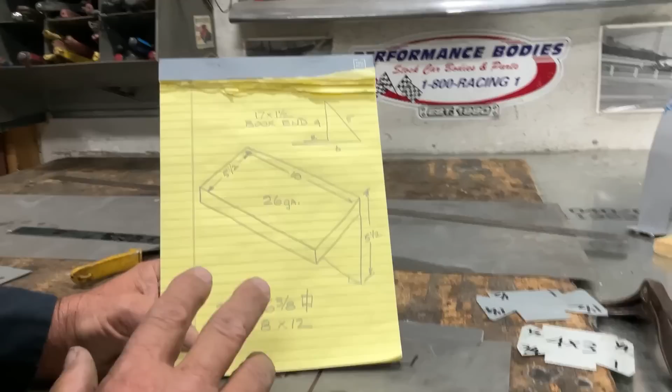Come on in real close and take a look at this. This is a typical drawing that I would start almost every project with, because until you can see it, you can't make it. So this is a bookshelf. This is the gusset, and this is the base that the books will sit on.

And we're going to make this, I think I've got a couple of different ways we're going to make this. And in order to speed up the process, we're going to use all of our professional tools.

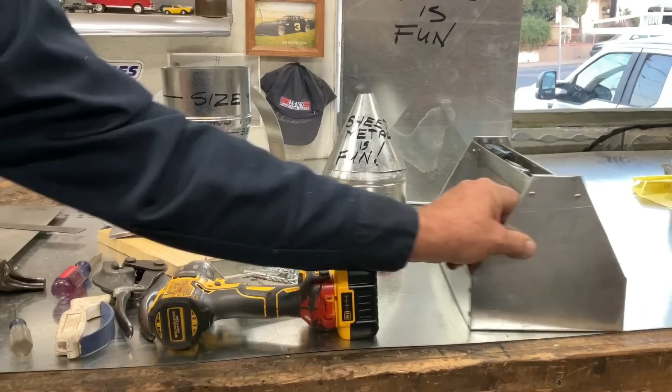But this whole project today that we're going to make could be made, if you go back and watch our video on how to make a tool tray with basic hand tools, the way we made this tool tray, you could use those same principles and those same processes to make this bookshelf. But I want to speed it up a little bit because there's a lot I want to get through.

So let's get right to it. So what we're going to do is we're going to start by making this part of the bookshelf is going to be a pan, and then we're going to make a left and a right gusset. We'll get to the bookend in a few minutes.

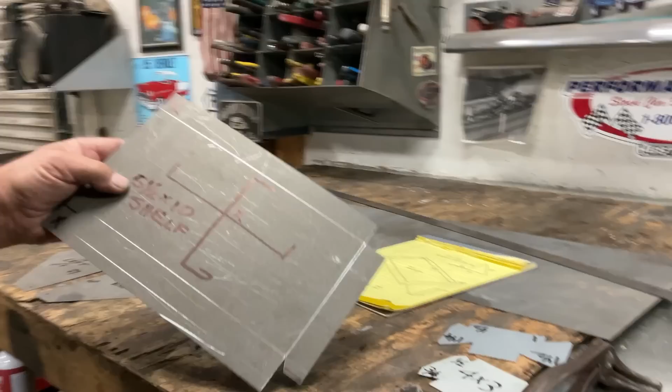So here's the pan. It's a 5.5 by 10 inch shelf, and right here I'm going to show you 3 different ways that we typically mark things in the shop, and these are just ways that this project will never be clearer in your mind than it is when you're right here, you're making it, you're notching it, you're thinking about it. It's never going to be more clear in your mind.

So while it is that fresh and that clear in your mind, go ahead and mark it. And then if you get a phone call or you started at the end of the day and you come back tomorrow, you don't have to go back and start from scratch. You can look at your instructions and you can pick right up where you left off.

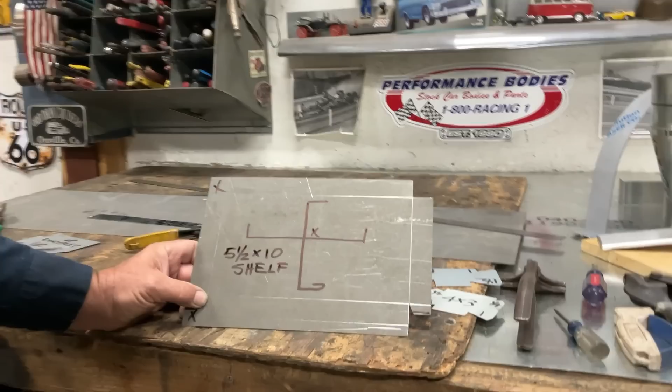So right here I've got 3 different ways that we would typically mark things in a shop. So a lot of this stuff for the folks that are going to be making these things at home, and also there's something that I have to be realistic about. A lot of you may never pick up a snip or a hand seamer or a hammer, but you may be following along at what we're doing here just to acquaint yourself with the process.

And I like that. I love that, because if there's one thing that we all need to do is we all need to become more capable. We all need to become more self-sufficient. We all need to become more aware of the world around us. I would like all of you to become more capable and have a marketable skill.

So AI may be coming down the road. We don't know. Who knows? And there's always going to be a spot for somebody who can show up, make something with their hands, and install it. That's going to be a long way down the road. So I want you to follow along and learn about how important it is to become aware of the process and how we develop a pattern, how we fabricate a pattern, and how we end up with a finished product.

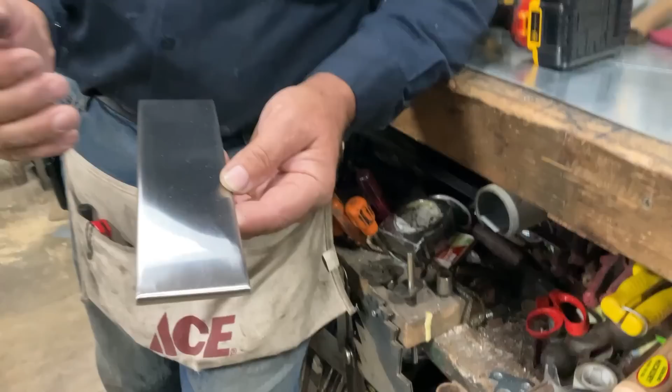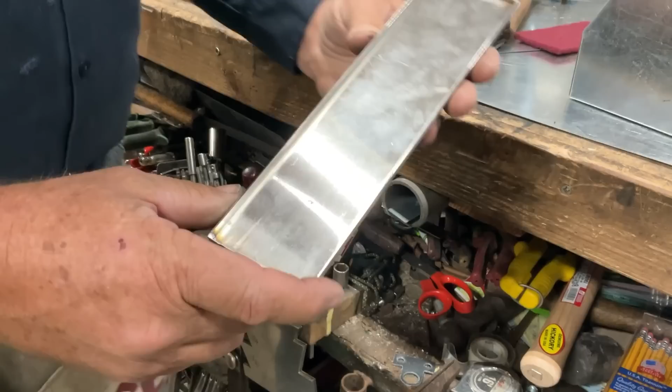We have a customer that installs faucets, and this is a block-off plate. Sometimes we'll make one hole right in the middle, and we make those holes as we go. This looks like a bar of stainless, but it's actually a small 1/4 inch deep pan. What we've done is made a little 1/4-inch pan, bent the corners around, welded them, and finished them off. Here at our shop, about half of what we do is welding and fabrication, and half is sheet metal.

This gives you an opportunity to see a typical day. This is what we made - looks like a bar of stainless, but it's actually just a pan. This gives you a chance to see something we make and sell.

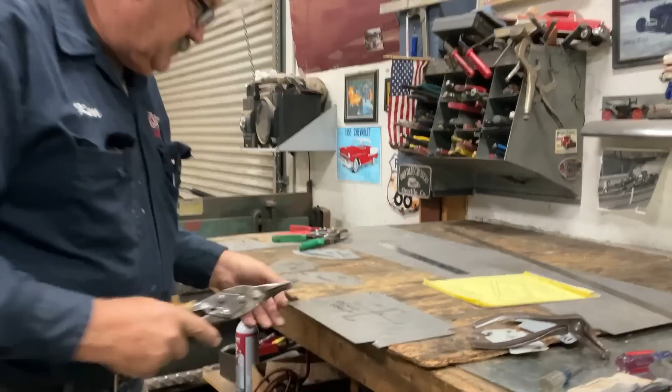So what we're going to do today is make a pan. The first part of our bookshelf is a pan. Come on in good and tight - I want to try to explain this diagram to you.

You are always X, X is always you. If you look at this X, this is a bend up toward X. This is also a bend up toward X. And this bend up toward X here, and then also we've drawn the hem on there.

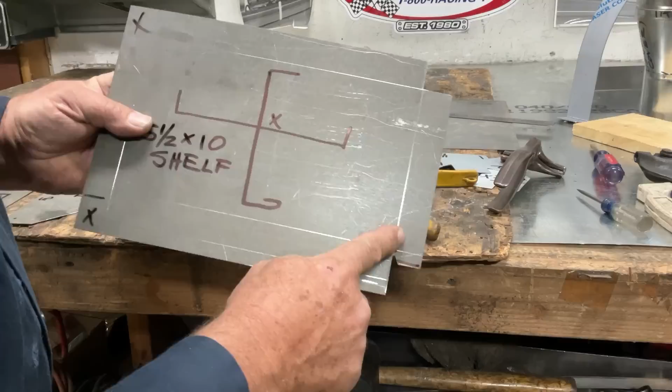So we have a 1-inch flange, a 1-inch 90 that's going to come up on this 1-inch scribe. I'll flash this around in some different directions so you can see the scribe line. Then this is a 1-inch flange across the back, 1 inch down the side, and the front is 1 inch plus a 1/2 inch that we're going to fold into a hem.

You can see we've already notched out a notch here - that's 1 inch by 1 inch. This is 1.5 inches because it's 1 inch plus the 1/2 inch hem. But we've also left a little tab here.

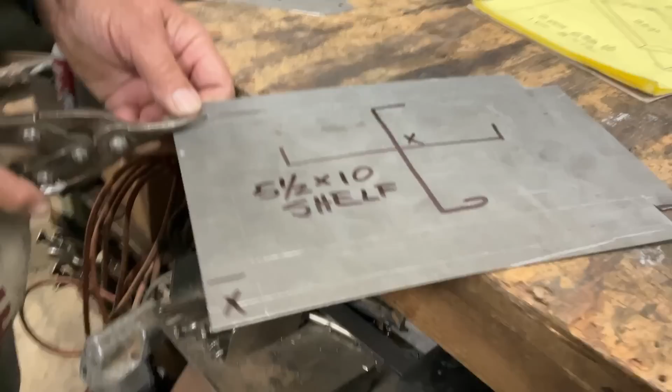Now that I've got one side done, let's do the second one. If you haven't watched our other videos - whenever we're notching, you always protect yourself against the part that you're removing, the drop. We'll call that the drop. But you'll notice I made this cut first.

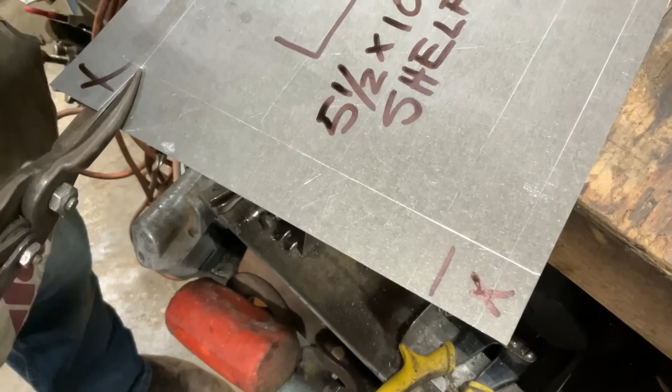Now I'm going to come over here and make this cut next, because if you can see the piece on your final cut, it can get to your eyes - it has a clear path to your eye if you can see it. But look at this, it all depends on the sequence. Right now my snip is covering the drop. I'm still going to hold it, but when I finish the cut, it can't come up.

So just so we get that straight, let's do one wrong - make sure we know this is wrong. See, I'm covering the drop with my snip. I'm doing this one wrong intentionally, so you can see the wrong way to do it. Look, automatically my thumb already covers the drop. Now I'm going to come right here, and you can see that without my thumb covering the drop, when I finish this cut, this piece could come up and could get into a place that we don't want it to get to.

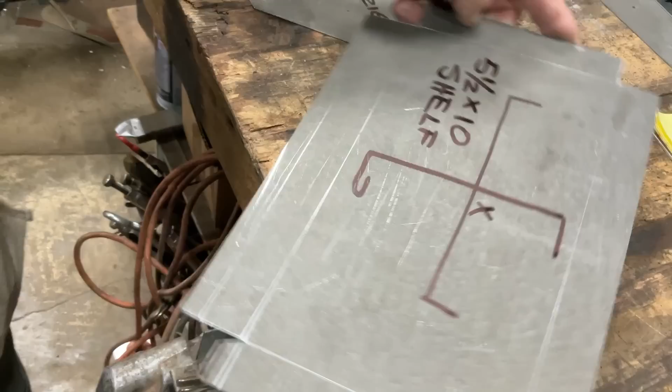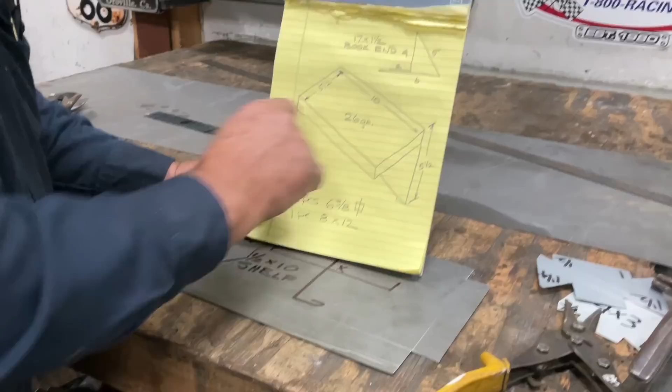All right, so we've got that notched. Now we're going to make our 2 gussets, and we've gone and marked them left and right, so they were both cut the same. If you want to know what we're making our project today out of, it's 26 gauge galvanized.

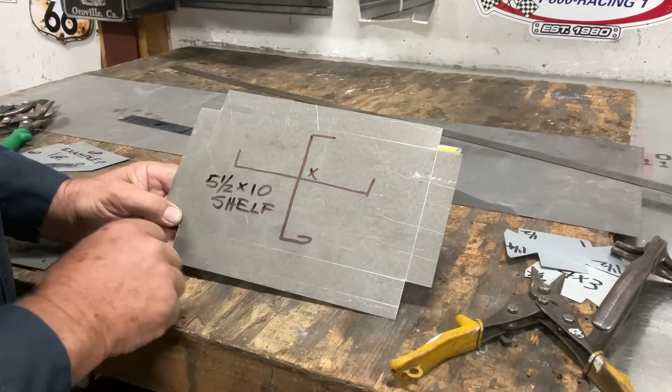That's about 19 thousandths. To make the pan, the top of our bookshelf, it's 8 inches by 12 inches. That means 8 by 12 is going to finish up with a 5.5 by 10. So 10 from here to here, 11 that's 1 inch, 12 the other inch. 5.5 plus 1 is 6.5, plus another 1 is 7.5, plus the other 1/2 inch hem - that's our 8 inch total. That's how we came up with a cut size of 8 by 12, 26 gauge, so our finish will be 5.5 by 10.

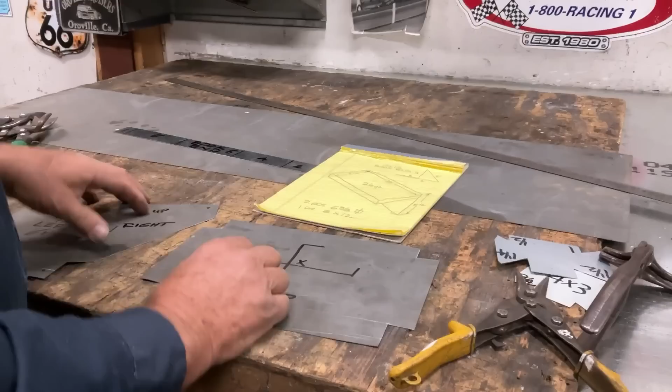Our 2 gussets that are going to go on the sides will complete our bookshelf, and they're going to have a flange that we can screw to the wall. This will be more clear once we bend it up. They both get cut the same size, and then we book match them so that we make sure we make a right and a left.

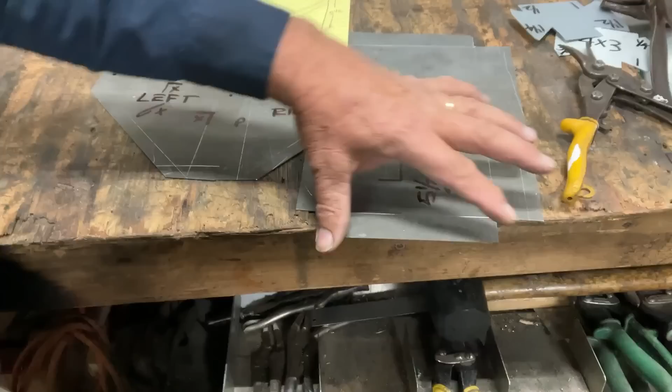These two pieces are 6 3/8 square. That's because our shelf is 5.5 inches wide. This is 5.5. And our gusset is going to be slightly less than that because we're going to put it underneath our shelf, so it's slightly less than 5.5.

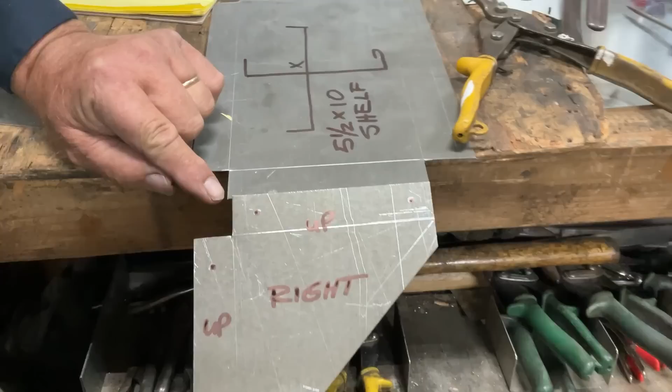I'm going to match these two ends up. See the difference right here? 1/8 of an inch difference. So this is a 5.5, and this is 5 3/8, plus we're going to add the 1 inch that we're going to turn for our wall flange. So it's a little less than the shelf pan, so it's going to fit inside. I think once we get it made up, it's going to be more clear.

So this is one way that we can mark. I made you an entire drawing of what this project looks like.

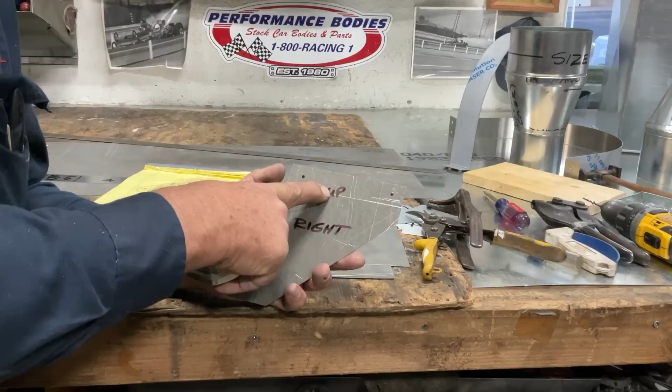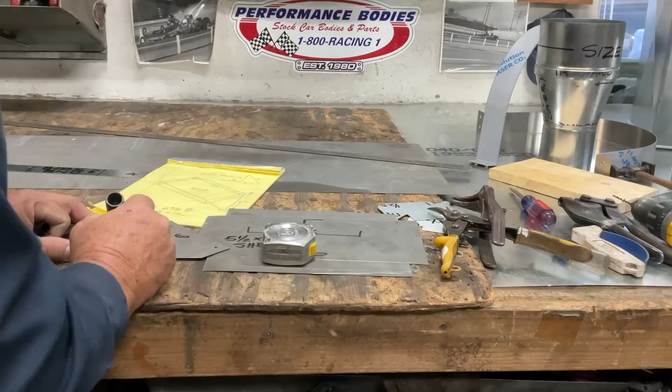Or we can mark each individual bend. This is going to be an up, up, and that's also going to be an up. Let's go ahead and mark that. On this one's a hem, so we're going to mark that hem up. Whenever it's our choice, we're going to make all of our operations the same way so that we don't have to flip the piece over in the brake. So that's an up and an up. That's also an up. That's going to be a hem up on that 1/2 inch line.

So we can spell it out. We can put up, up, up. Then here's the last way. This was a full drawing - that's the whole pan right there. Or we can call out each individual bend separately.

This right here, X is always up. So you can see that's a bend up toward X. This bend is up toward X. And here's the hem up toward X.

Now I've drawn this with permanent marker because really what we're making here is a visual aid. On your project, you can mark it with this - this is a water-based marker.

If you mark it with a marker like this, you can erase it with water. Now one of the things I want to do here - I've already notched these just to speed it up - this is a 1 inch flange and a 1 inch flange, so that's a 1 by 1 notch. And then we added a 1/2 inch across here, just so we don't have a sharp edge on the front of our gusset. But this is what we're actually making - these 3 pieces, this is our bookshelf.

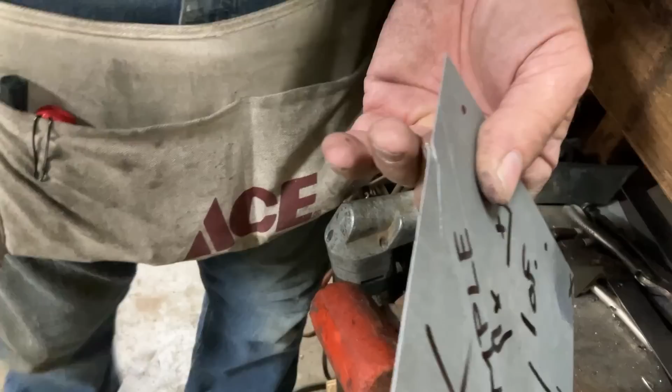So what I'm going to do, in order that we can cut that on that line, I'm going to take my red snips and come right here. Can you get in close and see? I'm just going to keep moving around because maybe you'll get a flash and you'll be able to see. I'm going to make the smallest notch with my red snips. I'm going to hold this here. Can you see that? See, I've made a small little notch. I made that notch right on that line.

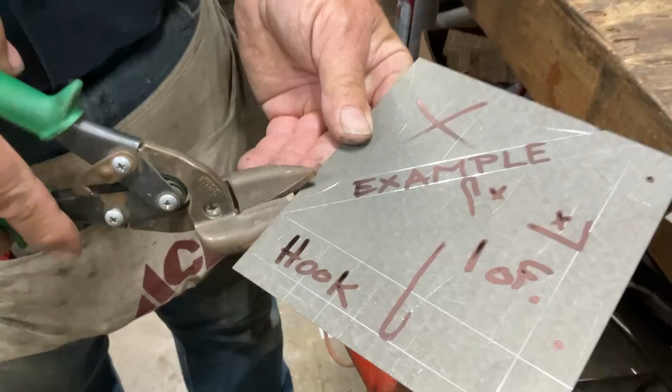So this one's red. Our next notch is going to be green. We're going to go to this side and we're going to make a green notch. It's going to be small - it doesn't take much.

If you look at it, it didn't take much. See that right there? So now what I can do is, let's say this block of wood was my bottom shear blade.

Now what I'm going to do is I'm going to go over to the shear. I'm going to slide this into the shear. Can you see what's happening right there? Those two little notches I made are actually contacting the back of the shear blade.

And so now when I go, I'm not just holding a piece on the shear and looking for the line. Out here where the line is very visible and I can see it, I'm going to make a left and a right. It's important that you make a left and a right. The right is on the right, left is on the left. That's pretty good.

So now what we can do is when we go to the shear, all we got to do is pull it back against that bottom shear blade, and then we're going to cut it off. So come on over here, let's do that.

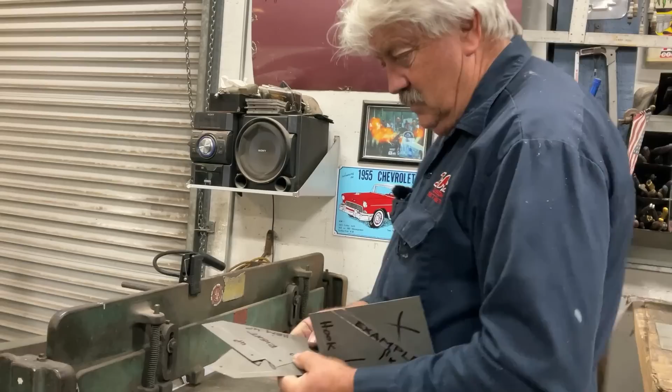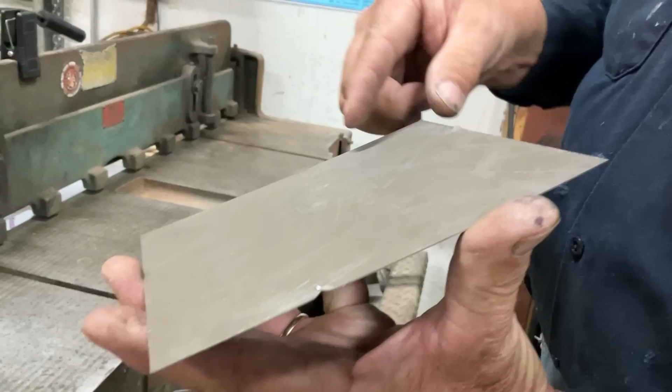All right, so here are the two gussets that we're going to use on our shelf. I cut these off while you weren't looking, just trying to expedite, speed up the process. So now we made a right nick and a left nick, and that gave us a little burr on the back. Now we're going to insert this into the shear.

Can you hear that? Can you hear it stop? Listen. Let's do one and a second.

Now I'm holding this. I'm just pulling back a little bit of tension against that bottom blade. Now, I don't have to look down here to see where that mark is. I know where it is. Look, we were able to just cut it right, and we got it right on the line every time. We're not going to miss it.

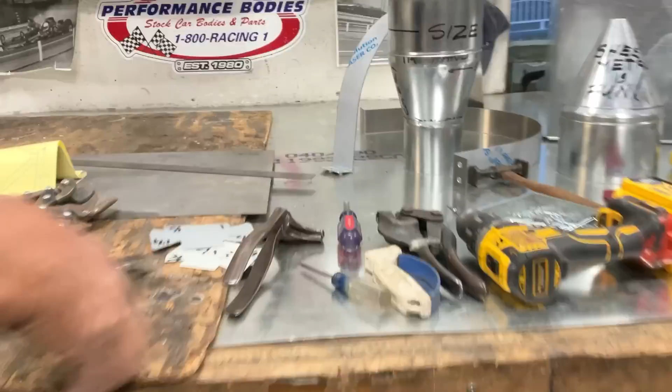All right, so now let's finish this one up. This is one of the ones that's an example. I'm going to make this gusset this way. Notice which way the piece is, right? My snips are covering it. Don't give that piece a chance to get to you.

All right, and then this one is, we're done. We're done marking. These are our two examples. Let's go over to the brake and bend up our bookshelf. The pan and the two gussets. Then when we put them together, you know what we got. Let's go to the brake.

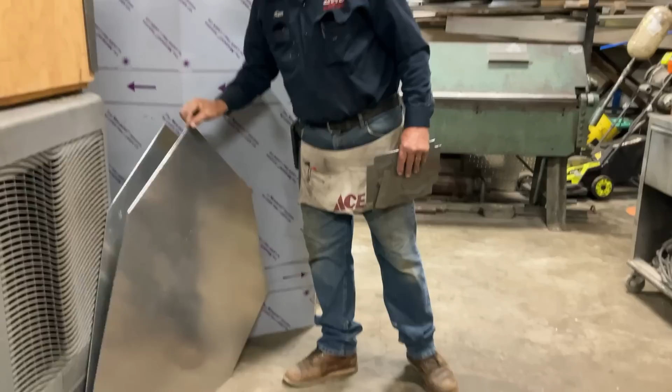So on our way over to the brake, I wanted to show you what we just made earlier today. These are pontoon extensions for a houseboat. Sometimes people build a swim platform off the back of their houseboat, and so that the back end of the houseboat does not sag into the water, we make these pontoon extensions. So you can see this thing is 6 foot tall. It's 120 thousandths, 5052 aluminum.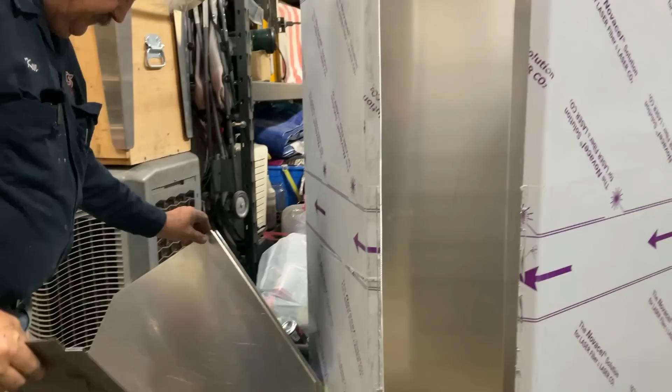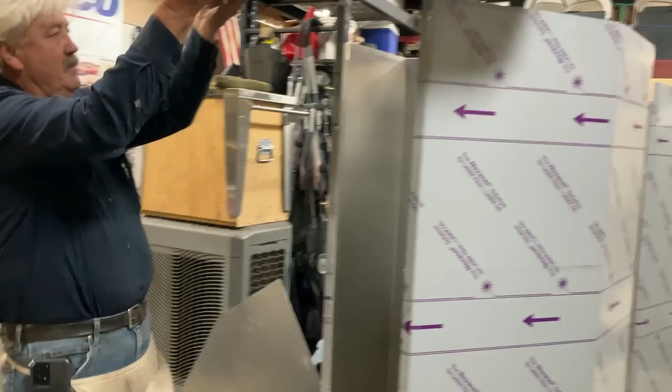These are the end caps. So this is just a protective layer of PVC that the manufacturer puts on the sheets so that when we're scuffling it around the shop, we don't scratch it. So this is what this looks like. So this end cap will get welded onto there. I'm not going to put it in place because it'll fall in the hole, and I don't have my earplugs on. That way you don't have to hear me scream when it does that.

Not part of our bookshelf, but I thought you might be curious, might be interesting. All right, now we're on our bookshelf.

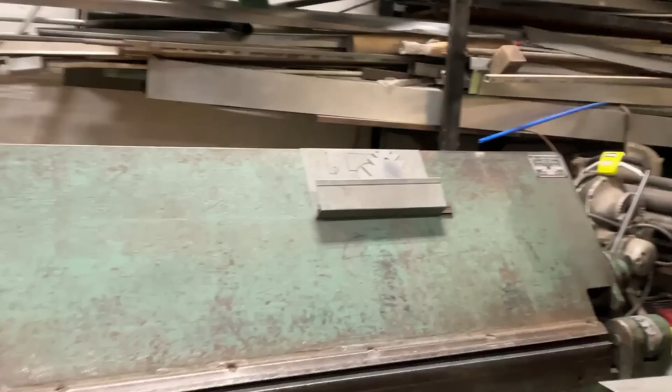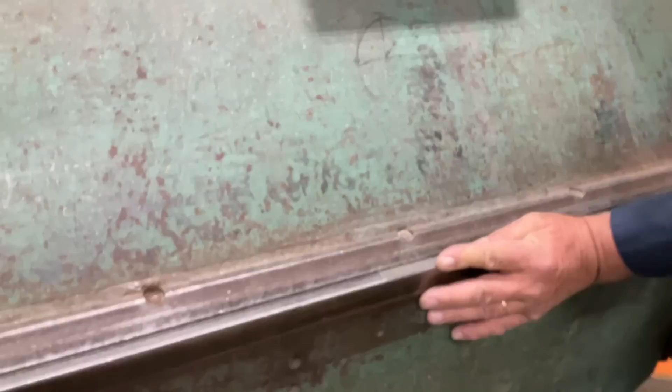So the first thing we're going to do, our sequence of operation is always do the thing that causes the least amount of change in the product. So the thing that's going to cause the least amount of change is that 1/2 inch hem in the front. We're going to bend that over. Like I said, if you go to our tool tray video, you can make this bookshelf with the same tools.

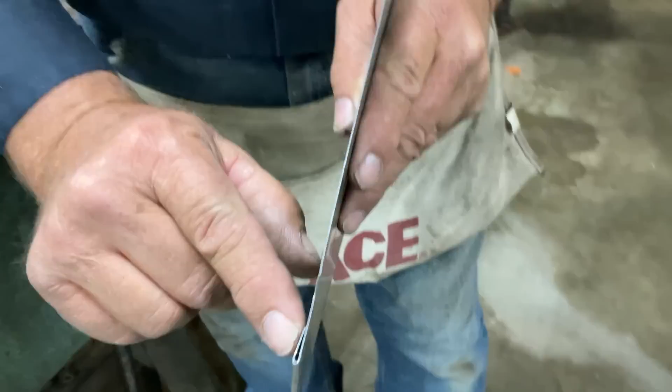Now you can see what I did is I folded over and then I flattened it out. If you look really close, that's a teardrop. That's where your strength is at. That teardrop is very important. If we just smash this flat, then we lose the rigidity that we get from the teardrop shape.

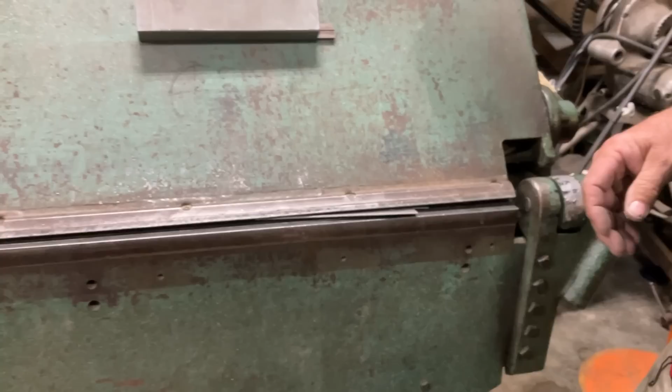So the next thing we're going to do is we're going to put on our reading glasses. Then we're going to bend this up on this bend.

All right, I like it. We can do another one right here. When this is flat like a table, that's when this is a 90-degree bend.

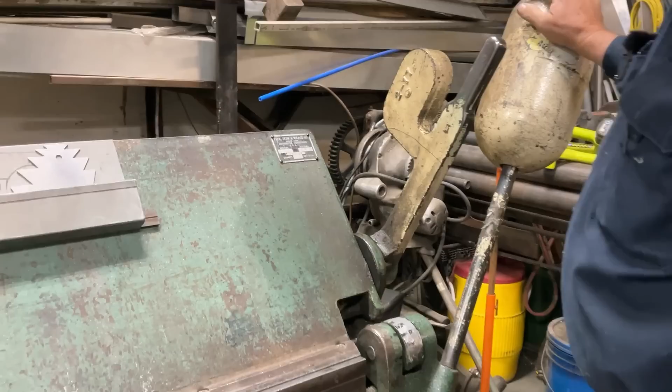This is the handle you use to clamp your metal into the brake. This is the handle used to perform the bending function. This is the bending leaf, like a tree. This is the nose bar, like a bar of gold.

All right, so we made 2 bends. Let's go ahead and make our 3rd bend. I'm just putting the nose bar right on our scribe line. Man, this thing's looking great.

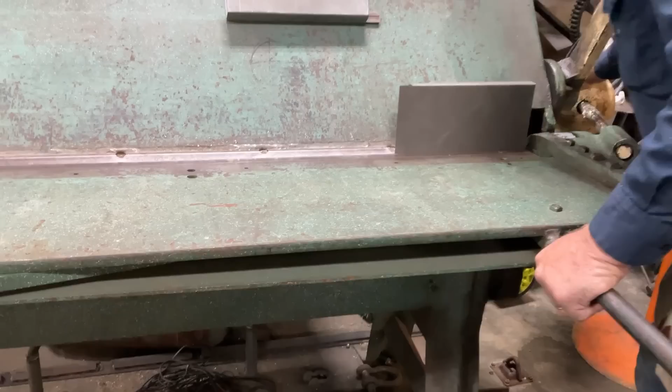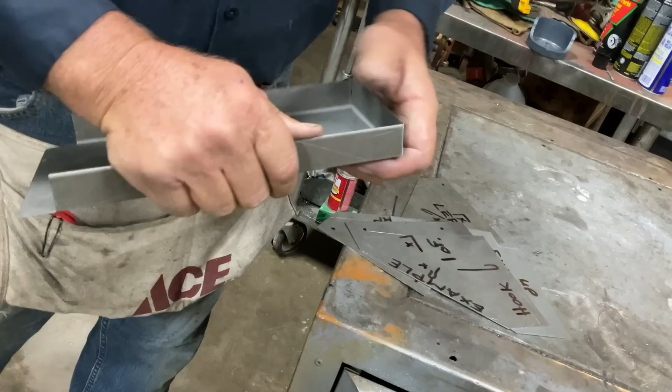So we're going to have to finish this up. Since it's a pan, we're going to finish it in the pan brake.

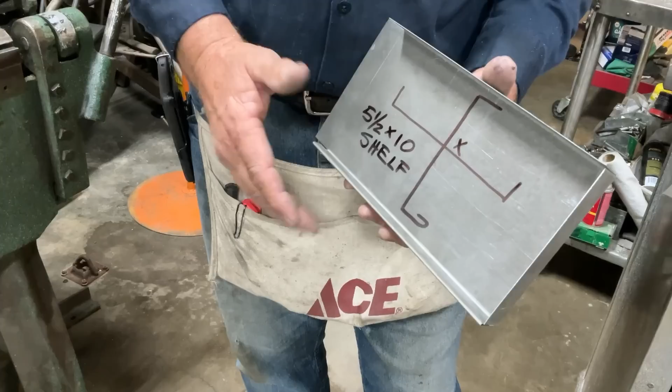Okay, so this is our first example. Again, order of sequence - always do the first thing. See this hem right here? If I would have bent the 90 first, I wouldn't be able to go in now and bend the hem. So oftentimes there's an order to the way you put your bends in. First thing we're going to do is the thing that affects the piece the least amount.

We get to decide, so we're going to bend everything up since it's up to us.

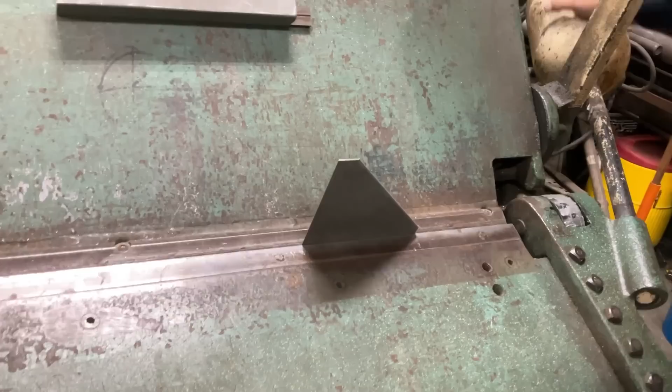Now this one, oh boy, this is getting tricky right here. This one is a hook. This is one of our example pieces here. So this is going to be all the way over.

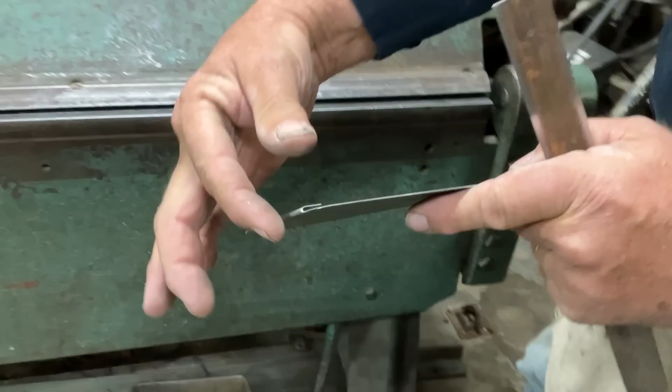Oh, look at this. I'm going to put something in there so I don't flatten it out all the way. Look at that. Can you see that? I didn't flatten it down all the way because I clamped it down on something.

Now, here's our last bend.

That's one example. Let's bend up our other example. Same thing - we're going to bend our hem first because it affects the piece the least.

All right, now we've got our hem in there. We are going to bend our 1 inch.

This is one of our example legs. A different way you could do it. It all depends on what you're looking for. I want to get it just right. After all, it is an example.

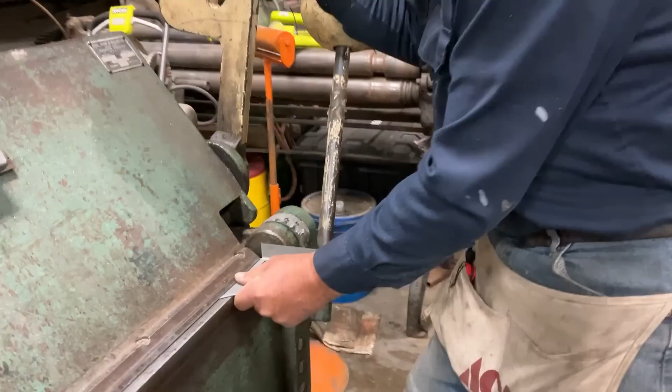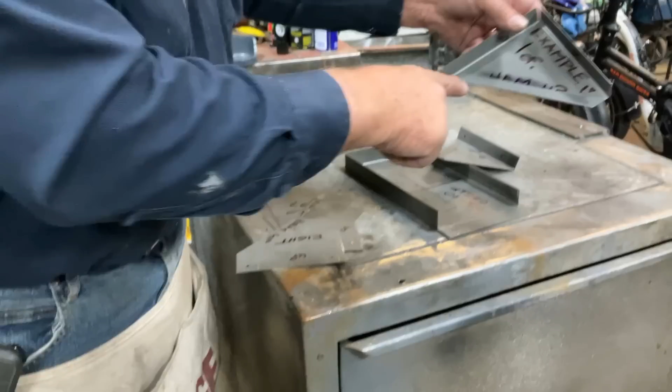So all of our bends were all up. We had an up, and a hem up. Still, that's our example. Now we're done horsing around - this is the real thing right here.

Said hem up, that's what we're going to do. And we're going to flatten that hem out, but we don't want to get it so flat that we flatten it all the way out. We still want that teardrop.

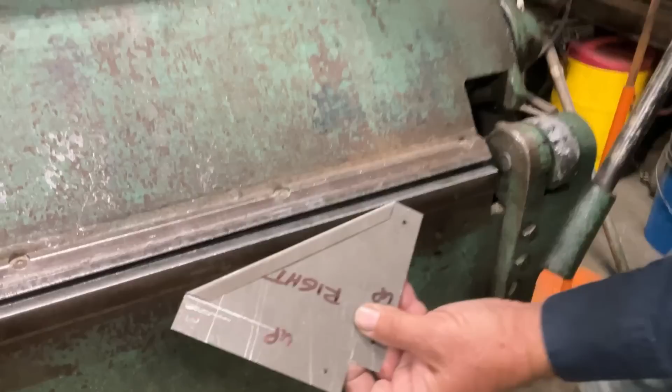Now we got the hem in there. This tells us up, so we're going to bend it up on that line. There's our mark. There's up.

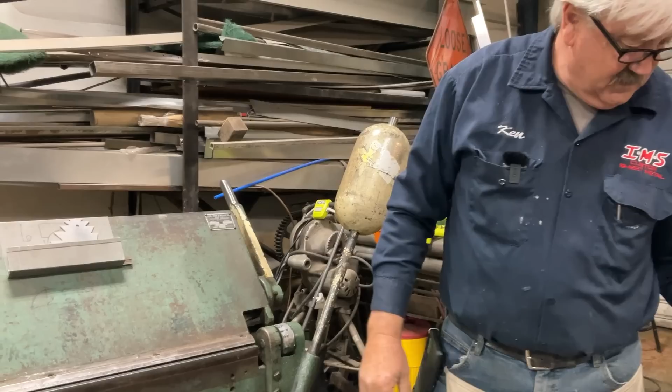Up again. Man, this thing looks good. Here's our hem.

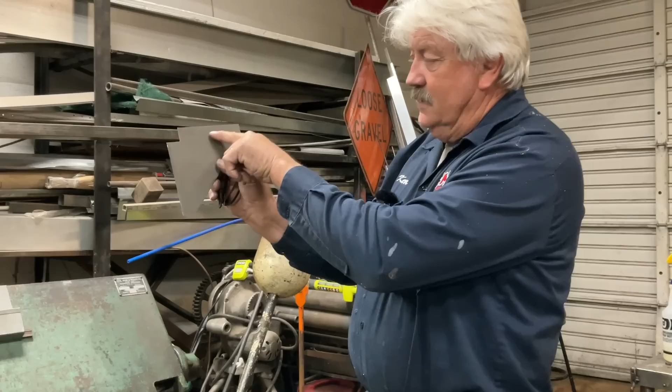So since we're the ones designing our bookshelf, I made the gussets symmetrical. The reason I made them symmetrical is because you could make a gusset that had a dimension here and then a longer or shorter dimension here. But if you make it symmetrical, it's a lot easier to get it right. It's a lot harder to get it wrong, because you almost can't bend it up wrong.

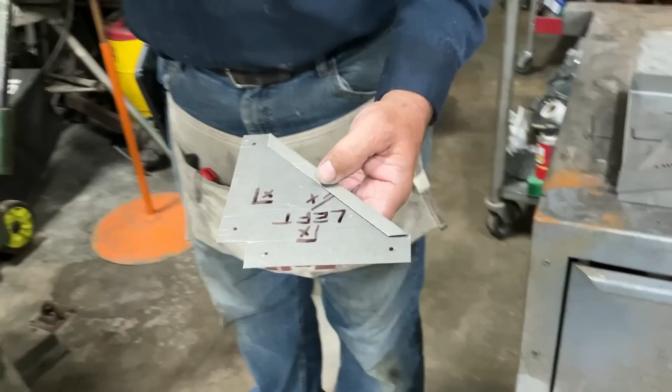This distance is the same as this one, and I'm up toward X, up toward X. So that's just another example of where you can do yourself a favor, give yourself a fighting chance to get it right.

If it's up to you. Sometimes the customer says, I want it really long down the wall and short at the bookshelf. And you've got to give the customer what they want.

So look at that, we made a left and a right. Because this is the real deal. Now let's go over to the box and pan, finish off our last bend. Then we can start putting our bookshelf together.

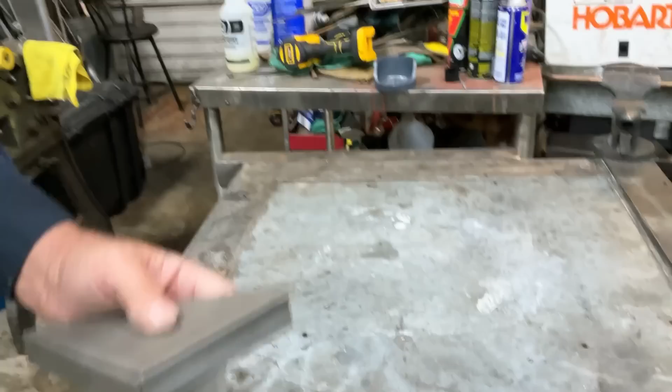All right, now we are back at the box and pan brake. It's called a box and pan brake because it makes boxes and pans. Box and pan brake, that's a regional name. This could be called a finger brake. What we're making, we just realized that these lessons are going all over the world. So some of the names I use are names I've been using for 44 years on the west coast of the United States.

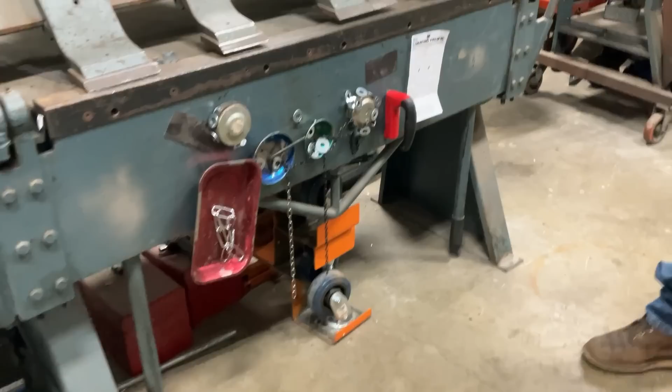So as you can see here, when our grandkids come over, they find all of Grandpa's magnets. This is the hard one. This one right here, man, this thing, well, I can't even get the piece off. There's a piece stuck on there. And so that's pretty much all of my magnets right there. They go through the shop and find them all. There's a couple right there.

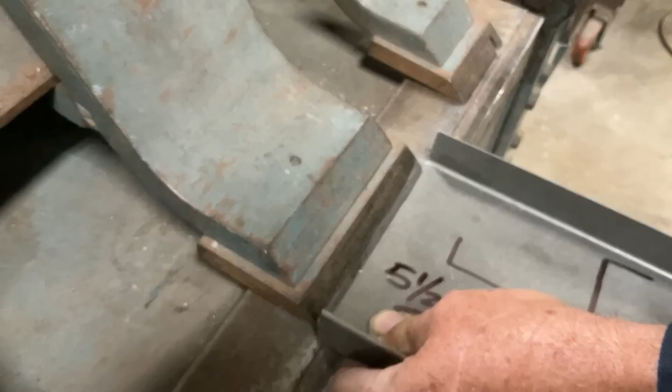So let's use our box and pan brake and finish off our shelf. We're going to come right here, clamp it on that line. All right, don't let the handle sneak up on you.

With these separate fingers, we can adjust. We have enough fingers to fill in all the spaces. This is 48 inches, so no matter what size box—see, here's a 4 and a 3, here's a 5, here's a 3—with the combination of fingers that we have, we can accommodate every pan.

Look at that, we finished the last leg of our pan. Now I want to file these corners down a little bit. Whenever you use a file, you only cut on the push. Don't drag a file.

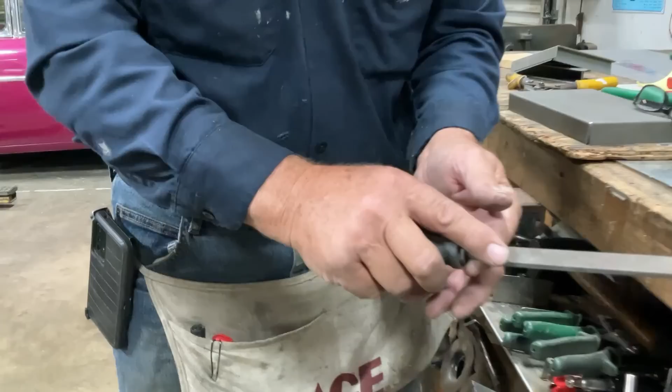A file and a hacksaw blade are both made the same way. The teeth lean forward like a linebacker in a football game, which means if you approach them from behind you can tip them over, but they're more difficult to tip over if you catch them from the front. So all the cutting edges on a file lean forward. I don't think you're going to be able to see it, but they all lean forward. So you only cut with a file on the push. You push, lift, push. Don't drag a file backwards across the work.

I'll come to your house, and boy, I snore like everything. You don't want that. Well, my wife says I snore. All right.

Let's come on back in here. Oh, you know what I want to do? Here's our Whitney punch. We are going to come over here. I love the Whitney punch. This is a number 5 Whitney punch, a handheld punch. Isn't that better than drilling?

That's our example. Here is our other example. This comes with a series of dies. Number 5 Whitney punch, like Mount Whitney or Eli Whitney. I put marks on here.

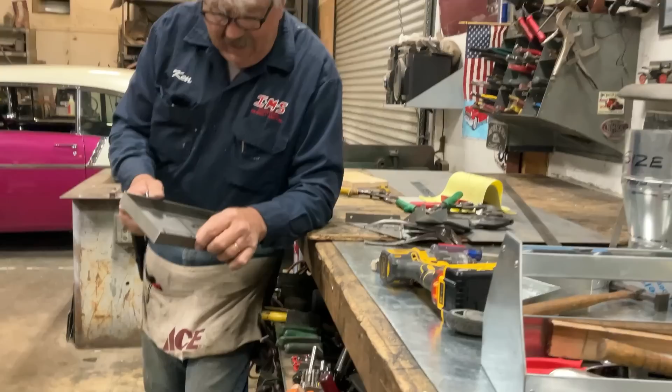Left and a right. We could take more time, measure the location of all these holes, but we're not going to do that. So let's look at our shelf. The back that goes against the wall doesn't have a hem on it. The front—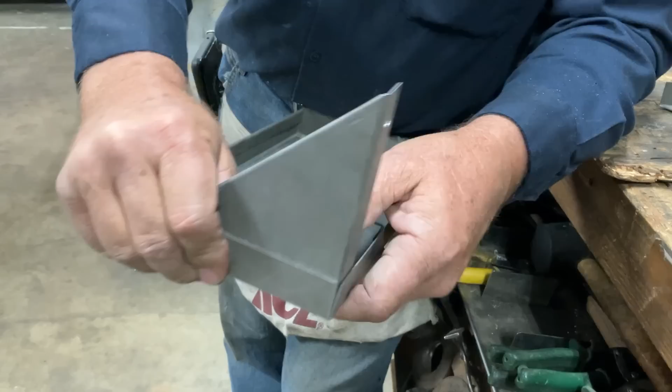You can see what I have here. Here's my gusset. I'm going to push this tight to the wall. Let's close this up a little bit. See that opening right there? Let's just close that up. There's the front, this is the back.

All right, so what we can do here is we can put 2 rivets in the side, and depending on your project, if you didn't want to put the rivets in the side, the way we turned a flange on the top, you could actually put the rivets into the top. So it all depends on where you would rather see them. If we were going to make this bookshelf here at the shop, we'd use a spot welder. This is a small handheld spot welder, and we could spot weld that. But maybe you're not ready to go out and spend several hundred dollars on a small handheld, or the giant Buzz back there—Buzz will knock holes in stuff. So here's what we're going to do.

Let's put a rivet in right here. Anytime you're drilling a hole, you always want to apply as much pressure as you reasonably can and turn as few RPMs as you can. Because if you're not making shavings, you're not cutting. And if you're not cutting, you're causing friction. What's a byproduct of friction? That's right, heat.

Always make sure you put yourself in a very safe place. So I'm pushing as hard as I can reasonably push. So if you're not cutting, all you're producing is heat. You can actually work harden the metal—it's like heat treating.

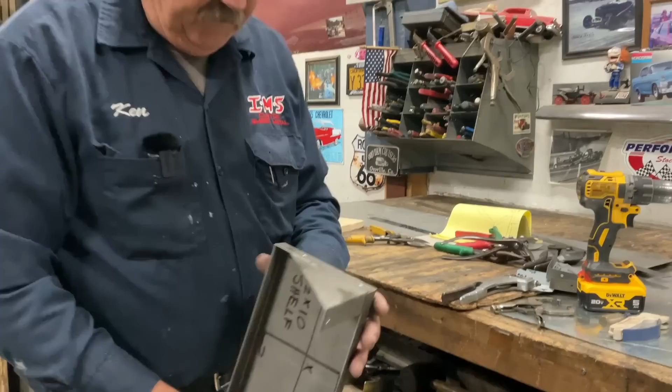Can you see how that went on there? And then we're going to do the same thing here. We punched 2 holes on the wall. Let's put that one in there. Oh yeah, you know what—this was one of our examples. Our example is... looks like I made both of our examples as lefts. So here's how you take a pop rivet out.

Apply all the pressure you can with the fewest amount of RPMs on a rivet. What's happening here is the rivet is turning, so I might have to approach it at several different angles until it finally catches. Keep yourself safe on these rivets.

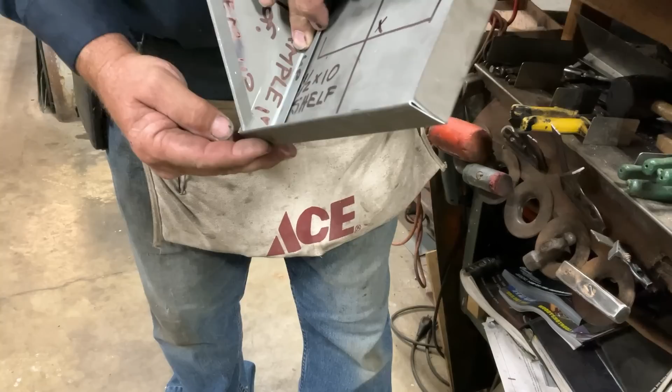Look at this intersection, where the gusset comes up and meets the shelf. See this little space right here? With this one, we actually built that space into the bracket, so it makes the gusset end up closer. If we held this up and put the rivets in this way, we could make that come out exactly where we want it. Get a visual picture of how this all intersects right here at the corner, then we would put our rivets in. That's because we built that space in.

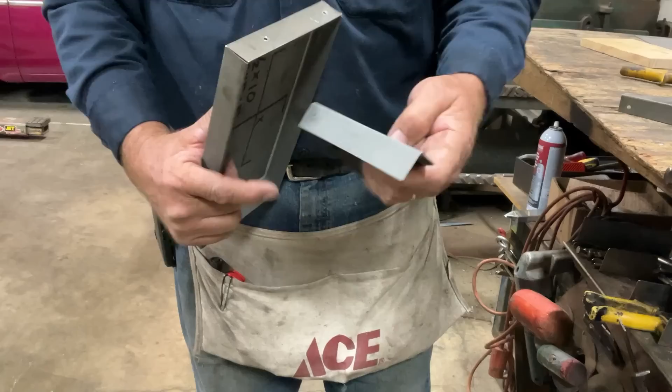So I want to show you, there's that space, you see that? I'll show you one more time. Now our gusset comes up and everything intersects at the same point at the front of the shelf because we built this offset into the gusset. This one was easier to make. Let's look at the difference. See the difference? We have this space right here. It's just a visual, it's not a strength thing. So we've done that one.

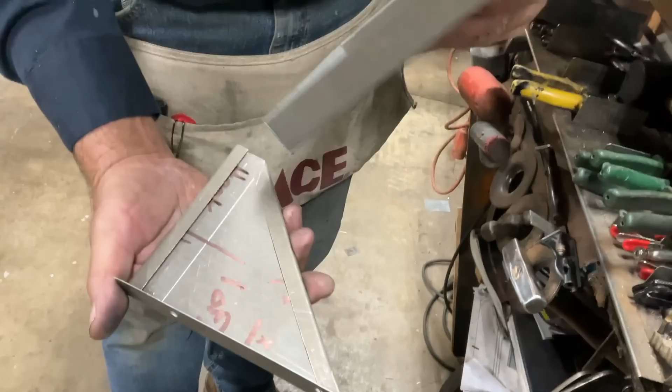We've gone through this example with the offset notch, and now we've done this one where we bent a hook. See where it says a hook right there? This is the front. So here we go, there's the hook. Watch how that hook engages the shelf. Do you see that right there? Now the hook is coming around through the bottom of the shelf.

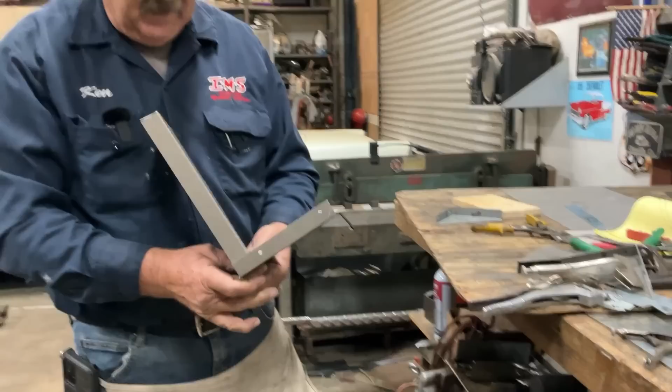This would work out really good if you didn't have a pop riveter, you could actually grab your hand seamers and you could flatten this down. Pretend I'm chomp, chomp, chomp, chomp, chomp, flattening it down, so just imagine that's really flat right now. And look, we built the offset into this one too.

So this is what your bookshelf could look like when everything intersects at the same corner. We can put one rivet in here or none, because once we screw this bracket to the wall, that shelf cannot go down. It's captured inside that hook. That's the reason we put that ruler in there when we flattened that hook, because we knew we were going to come back and assemble our bookshelf this way. So here's the hook example, and here's the example with the notch, where everything intersects at the same corner.

All right, those can get out of our life. Oh, so we got our left and our right. Don't go anywhere. Don't. Looking good, looking good. I'm still here. All right, I'm back.

All right, I'm a sheet metal guy, so I love sheet metal. Sheet metal is fun, look at some of this stuff we've made. All of these things are in other lessons, but look at this. I'm a sheet metal guy, sheet metal is fun, we all know that. But let's take the two gussets that we made for our shelf. Really? See, there's our shelf. Ta-da, bada boom, bada bing.

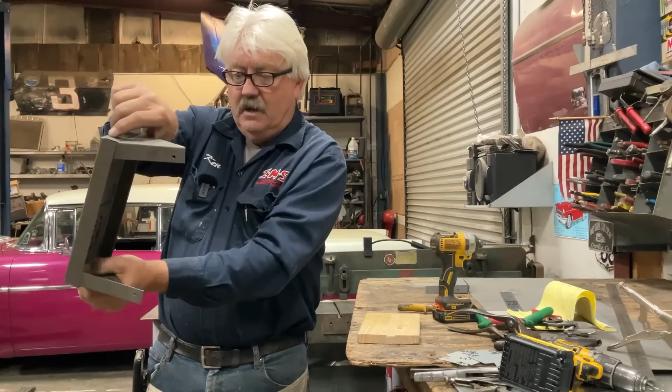But I know what some of you are thinking. You guys are thinking, wouldn't it be nice if he would make something with wood? It's going to be pretty rare, but we're going to use this wood. Look at this. So now we've gone through all the trouble to make these brackets.

I know what you're thinking, you clicked on this because it said sheet metal was fun, and here I am using wood. But look, maybe you don't want a sheet metal shelf, maybe you want a wooden shelf. Wouldn't that be nice? So you can see, here's our flanges, we could screw this to the wall, have a nice wood shelf.

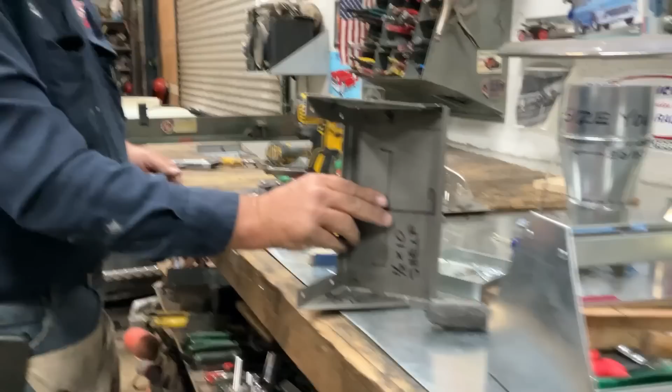All right, look at that. There's our bookshelf. I just covered up our holes, but we have the cure for that. Bam! Bang! Zoom. Two more holes. So, all right, let me show you what we're going to do. Look at that, just take a look at that for a second.

All right, here we are. It's come down to it. We've made a pan, we've added our gussets, a left and a right, and we've installed them on our pan. We're going to put this thing right here. We're going to make it level.

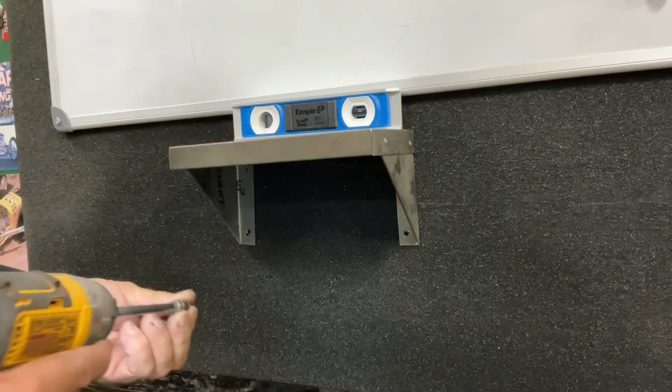Look at that. So now we have a nice little bookshelf.

We can put things on it, like the pocket watch my dad gave me, the smallest, tiniest wood plane ever. Among my dad's hobbies, he was a watch repairman and a clock collector. This is a railroad grade watch, very high grade.

That bolt and nut — when my dad would take something apart, he'd put the washer, if there was one, and the nut back on the bolt. So my dad put those together. He's been gone 19 years, and I'll never take that nut off that bolt. So it means a lot to me that it stays on there because he put it on there. But look at that. Look at that beautiful little shelf.

All right, one last thing I want to do. All right, so we're almost at the end of the lesson. Once you saw that bookshelf, what I want to do is encourage you to think and create. My daughter-in-law, Holly, gave me this little car that she played with when she was a little girl, and I wanted to display it in a way that I could see it.

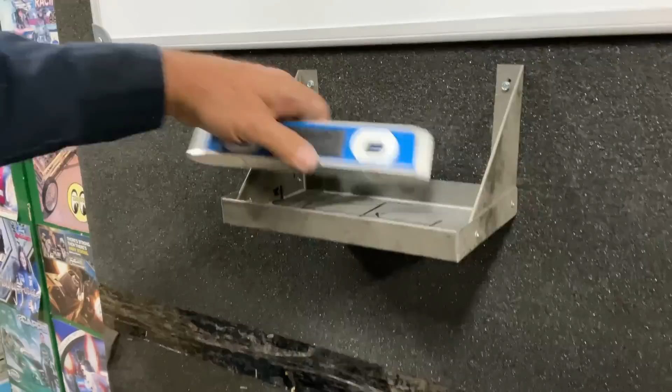Dun, dun, dun. There you go. Now we have a tray that could be for also a bookshelf, or a tray that you want to put things in, like this. We could put that in there. So there you have it, a bookshelf. It can be installed right side up or upside down. It's your bookshelf. You decide which of those two is the right one for you.